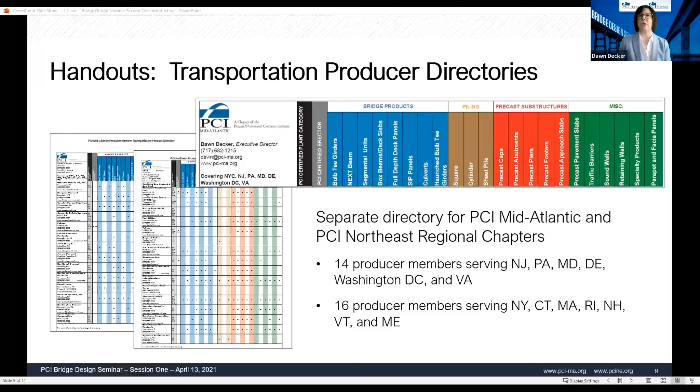A little bit about some of the handouts that you should see in the chat function at the Dropbox folder. PCI Mid-Atlantic and PCI Northeast have created easy-to-use, up-to-date transportation producer member product directories. In the Dropbox folder, you can download each of these files. Product categories—if you look to the upper right part of the screen here, you can see that in these matrices there are the bridge products, piling, precast substructures, and other products such as sound walls, traffic barriers, and specialty products on these directories.

PCI recently published a new 2021 Transportation Publications and Online Resources Catalog. This 20-page reference guide, also located in your handouts, reviews the 20 publications and 28 online e-learning courses available for your professional use. During her session, Rita will discuss some of these specific publications and courses.

For today's agenda, Reid Castrodale will discuss the basic concepts of prestressed concrete, fabrication of prestressed girders, and economical detail of prestressed girders. Notice that each one of these topics has a separate handout in your session 1 folder. Greg Gorman will deliver a virtual plant tour, and Reid Castrodale will provide an overview of transportation resources, including NEXT beam updates. We'll conclude with a question and answer period facilitated by JP Binard and Reid Castrodale.

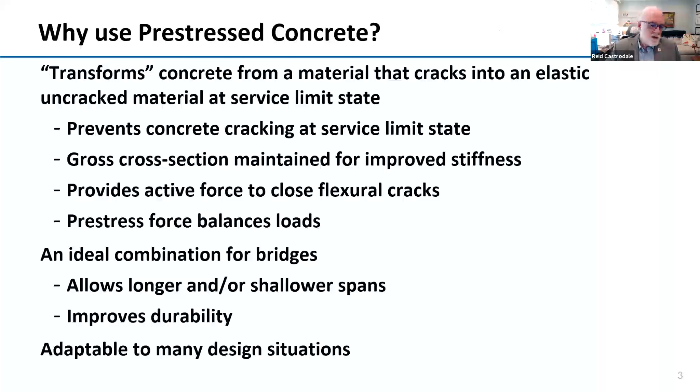Another concept involved is that prestress forces within a member balance loads. We'll talk about that briefly in just a moment. It's really an ideal combination for bridges: prestressing allows longer or shallower spans, improves durability, and it's a very adaptable concept.

When we prestress concrete, we use high-strength steel that is pretensioned or prestressed, and the reaction of that against the concrete precompresses it to counteract the tensile stresses, eliminating cracking at the service limit state.

Typically when we design, we just look at stresses, but this approach can be very useful in some cases. If you have a circular or parabolic tendon profile, it exactly counteracts a uniformly applied load. Even with straight strands, you have a moment being applied that counteracts, not exactly, but still counteracts the applied loads.

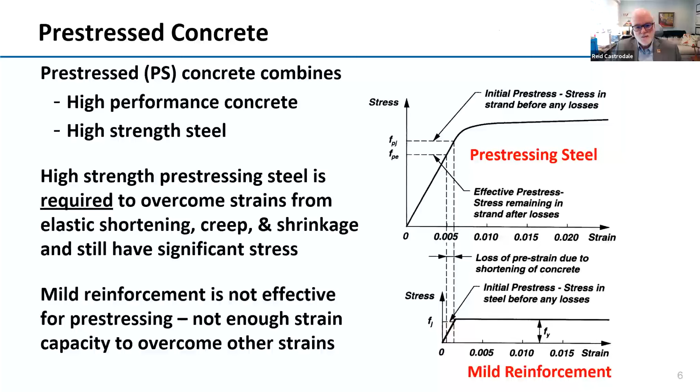You have permanent anchorage hardware then that is used to transfer the force and maintain that elongation in the steel. After you have locked up that elongation, applying that pre-stress to the element, the duct is typically grouted both for bond as well as for corrosion protection.

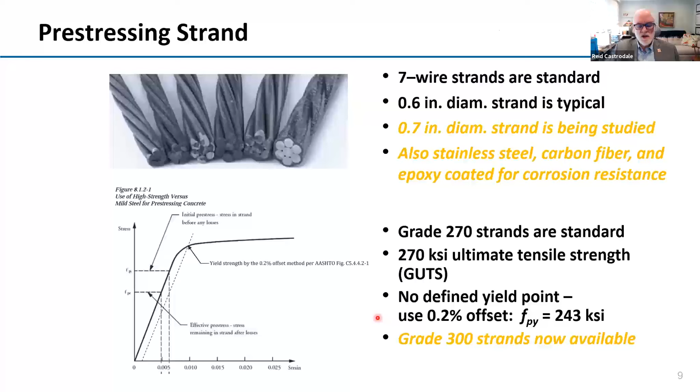When you post-tension a member, you have to have hardware, and this is probably the last mention we have of post-tensioning, other than some combinations with pre-tensioning. You have to have a device that's embedded in the concrete that distributes the force into the concrete, since it's a highly concentrated, large force being applied through all these strands.

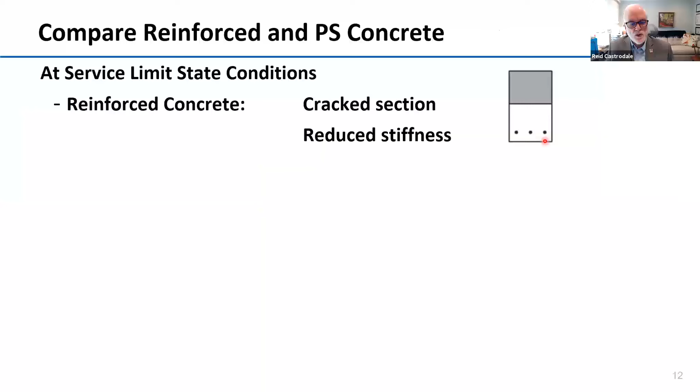If we compare reinforced and pre-stressed concrete behavior at service limit state, with reinforced concrete, as we all know, it's a cracked section. So the top of the flexural member would be in compression down to the neutral axis. Below that, we neglect any tensile capacity of the concrete, and the only thing available to provide the balancing force for the compression is the mild reinforcement.

For pre-stressed concrete, we have an uncracked section at service limit state. While we may have a little bit of tension, it's not enough to crack the section, so we're able to use gross section stiffness, which is good for deflection and such.

At the strength limit state, the behavior between the two is essentially the same. The reinforcement does yield if you're using mild reinforcement, while with strands, they're past yield, and we have to estimate the stress in the strands, which is nearing the strength. The compression stress block is the same for either reinforced concrete or pre-stressed concrete.

So why do we pre-stress? We pre-stress basically to get structural efficiency and cost effectiveness. We're increasing spans, reducing the number of girders, whatever it may be, and then durability. We're getting the crack control that we want, and we also have high quality concrete from a precast plant.

So those are the main benefits, but there are other aspects of design that are important: low maintenance, quality, and standardized sections to get the greatest economy out of these cross sections. It's a good clean look. We can accelerate bridge construction. They also have good fire performance. The concrete protects the steel within, and pre-stressed concrete has performed well over many years.

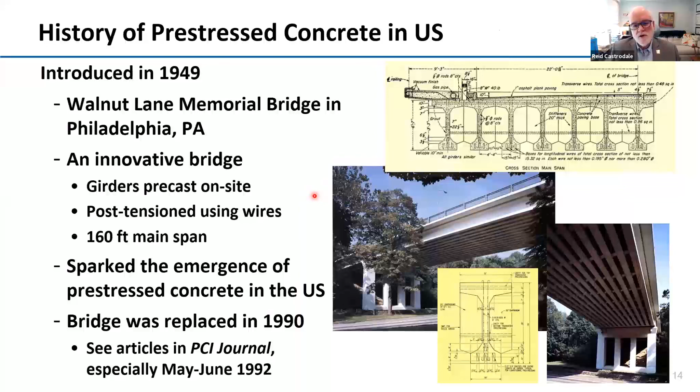Now, there were some difficulties with this early post-tensioning system and the effectiveness of grouting and such, but it was replaced. The bridge was replaced with pretty similar current sections back in 1990, and there are a number of articles both about the first bridge and the replacement bridge, as you see in the PCI journal there.

At that point, there was rapid development of the technology and materials used for pre-stressed concrete. In the 1950s, 7-wire strand was developed, plants with long line pre-tensioning beds were developed, and chemical admixtures, higher strength, and steam curing all contributed to the rapid development and use of pre-stressed concrete in this era when the interstates were being built.

So by 1958, there were more than 200 pre-stressed plants in the US. So from nothing in 1950 to 200 plants by 1958 is really a significant growth.

As the industry was developing, they recognized the need to focus on quality, and they developed a plant certification program. It's been in place since 1967, and it really assures owners, specifiers, and designers that plants have the capabilities and processes to produce a quality product.

Certification programs are also there for plant personnel. Many of the DOTs in the US require PCI certification. It's up to just over 80% at this point of the DOTs, and most in the regions we're talking about today are also requiring PCI certification for pre-stressed girders.

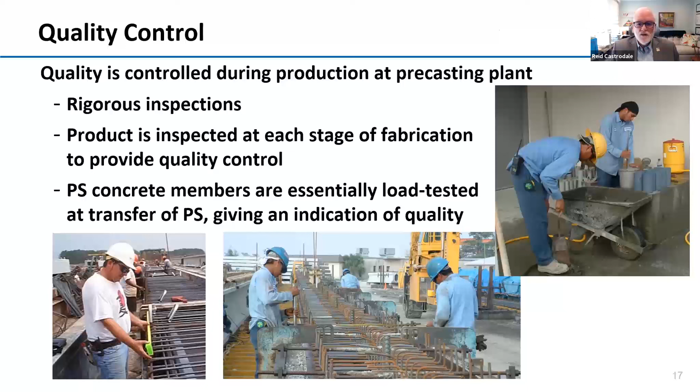So how much or how widely used is pre-stressed concrete? The National Bridge Inventory, which is used by FHWA and maintained by them, has the inventory of all bridges in all states. You can look at that and get some very good information. It's not perfect, but it gives a good indication of the use of different materials for bridges.

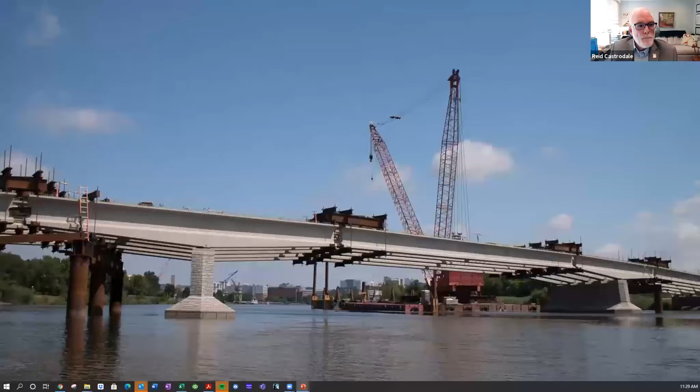So with that, that completes the first of our presentations, and I will move on to the second one, which I am also doing, to talk about fabrication - essentially what's in chapter 3 of the bridge manual.

Economical fabrication of pre-stressed concrete bridge girders really depends on us as designers designing properly and providing good details. For the most part, we have good details that have been developed over the years, and it's good to use those - we want standardization, that's important. So that's part of the reason for this presentation, so designers will understand how girders are fabricated and some of the reasons behind details that could help us get the most economical solutions.

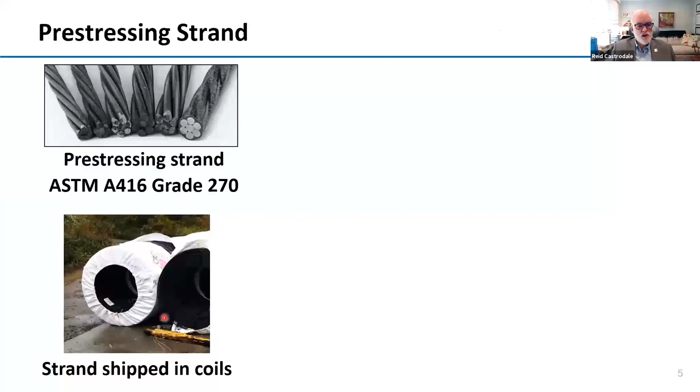You see these here. We'll have another brief discussion of those materials. Again, 7-wire strand, grade 270. The strand comes shipped in coils that you can see here. And then they're placed, strung on the bed.

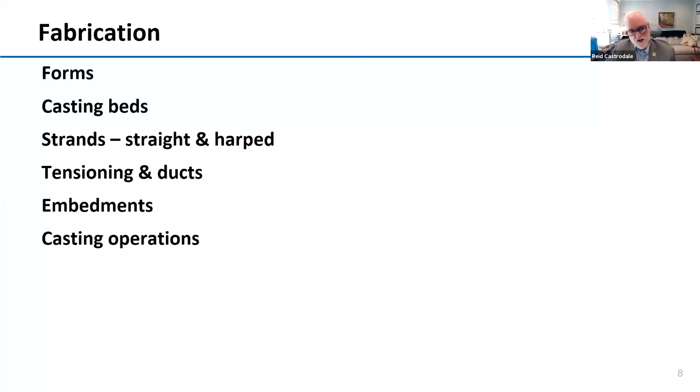So now we'll talk about fabrication. Each of these topics will be discussed as we go along, and we'll start out by talking about forms. A number of different types of forms. Oftentimes we don't have to think about that as a designer, but we should be aware of them.

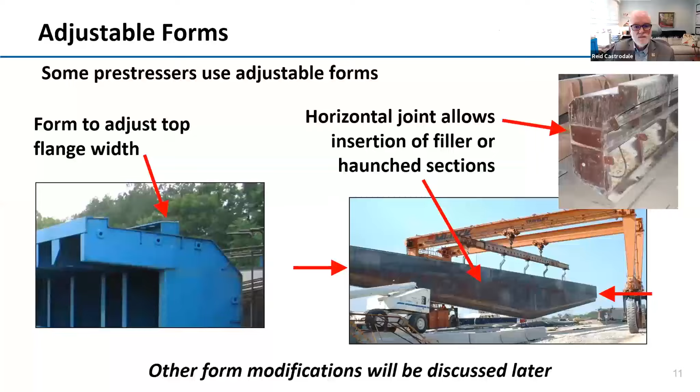So that's three sides - the top, the bottom, and each side - formed. We have to confine the ends too. We have to provide a header, it's called, to end the girder. So that's a form that's applied at the end.

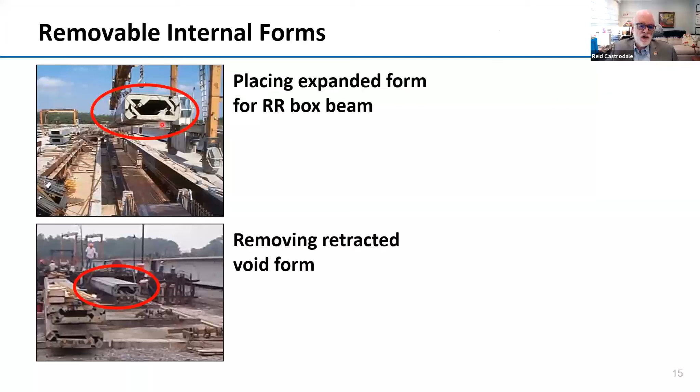This is a railroad bridge box girder being fabricated using a collapsible interior void. Something else we sometimes see fabricated using a collapsible void is a cylinder pile, where the form can retract upon itself so it can then be extracted after fabrication.

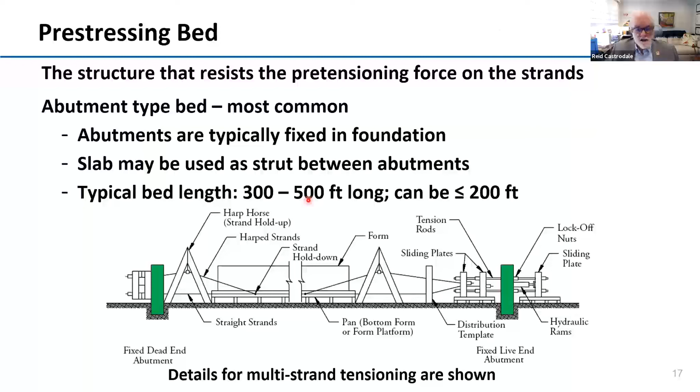For pre-stressed beds, we have to have anchors at the ends, these abutments at the ends. That's typically what's done. If we don't have a self-stressing form, instead we have side forms that are moved on and off and segmented, so there's no way they can really function as a form that would resist the pre-stress. So instead we have a structure at each end, abutments, fixed into the foundations. The slab may function as a strut between the abutments, and these beds can get quite long, up to 500 feet, maybe even longer. In some cases they can also be short, depending on the types of products being manufactured.

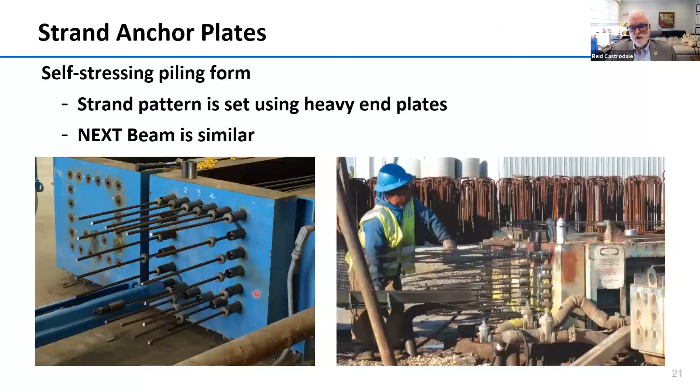But it's a barrel that's tapered, with a tapered recess in it. There are wedges, typically 3, held together by an O-ring, and the strand passes through, then there's a cap that's spring loaded that connects into that.

There's also the potential for using strand splices. Now, you don't put these within members. This would be if you had tails that you wanted to use for stressing, maybe you had a lot of unused space in a bed and were going to have to do that several times. It's possible to use strand splices to minimize the use or waste of strands in situations like that.

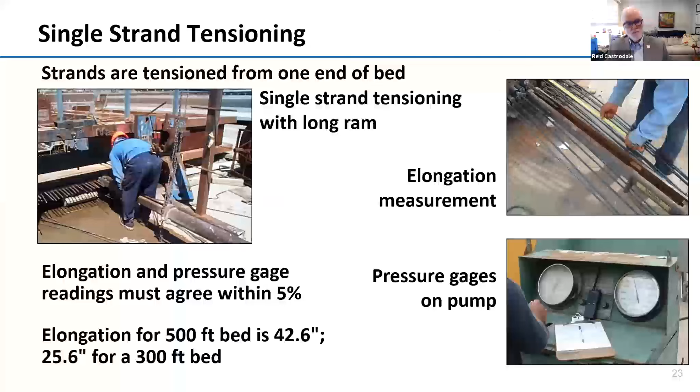There's also a concept called multi-strand tensioning and detensioning, in which the abutment is in the center of the stressing arrangement. You have the strand anchor plates that slide over on the girder side of the abutment, and then you have the ram on the back side of the abutment, and the ram pushes on another plate. So there are a couple of large bolts or rods that pass from this side through the abutment to the other side. And then all the stressing of all strands is done at the same time. So that's gang tensioning.

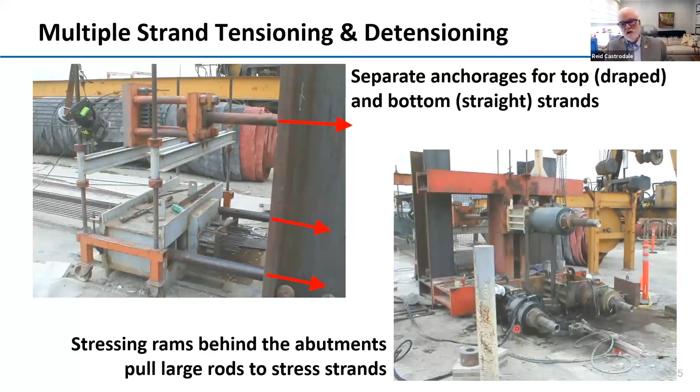Now, when you pull those strands, you have to lock them off, lock the elongation off. You don't maintain that elongation using the rams in case you had a leak or something. So those get locked off mechanically with some nuts on these big rods. And then to detension, you simply re-energize, repressurize these rams, loosen those nuts, and then detension the whole bed at the same time.

We can have straight strands in our beds, you can see straight strands here. Or we can have draped strands. Draped strands have to be held down, they don't just stay put because you told them to.

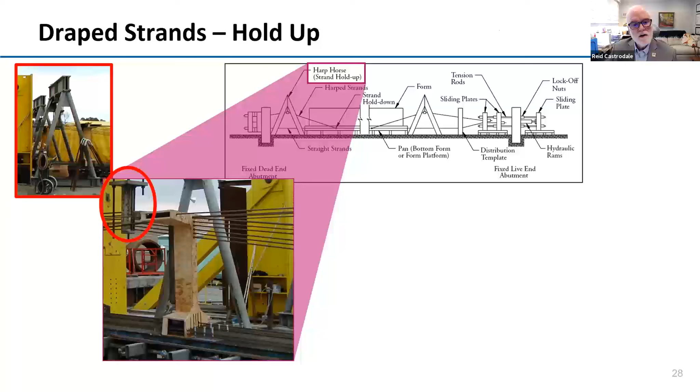Here's some close-up pictures of one plant's internal hold-up devices. This is in the bottom, or lowered position. You can see the rollers down here.

The crane comes in once it's in position, and it lifts up this bar with all these holes in it. Then a guy gets up there and sticks a pin into one of these holes to maintain the elevation of those strands.

Those strands are usually under tension when they're pulled up, so there are safety issues involved, as the guy is right next to live strands being tensioned while he's putting the pin in. There are safety considerations we'll talk about later. Here you can see the strand rollers are up in the elevated position.

When we stress strands in a plant, all strands are tensioned in two steps. You put an initial tension into the strands, depending on the bed length and procedures. That takes out the slack and seats the chucks at the dead end, which is the end you're not stressing from. This gives you a good, reliable, consistent starting point for making your elongation readings.

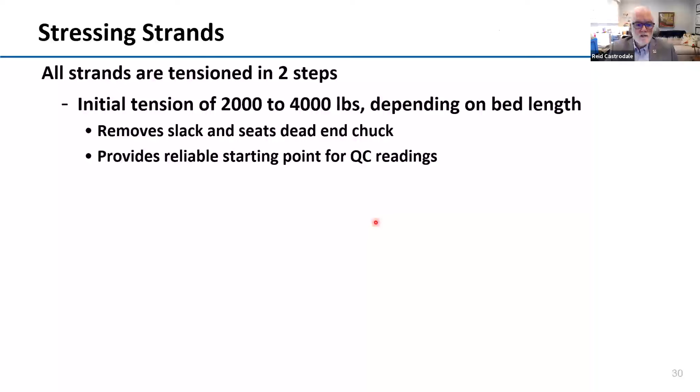After that is established, you apply the remaining stress up to the full tension, which is typically 43.9 kips for a 6/10 inch diameter grade 270 strand.

There may be some corrections applied to the elongation to account for things like the abutment moving, the chucks seating, or temperature, because as temperature changes the strands will elongate or shorten.

Draped strands, if you raise them after they've been tensioned, will have different forces in them. We'll talk about that more in a moment, but the forces and elongations are going to be different for draped strands. Not only do you have safety issues with draped strands, you also have additional complexity in the stressing operation with draped strands.

The other option we have for dealing with stresses at the ends, I'll talk about in a later discussion, I think a week from today. We'll talk in much more detail about draping and debonding.

We can also use debonding to control stresses at the ends. A debonding situation puts a sleeve over the strand which prevents the bond between the strand and the concrete. Remember, for pre-tension concrete, that's how we transfer force between the strand and the concrete.

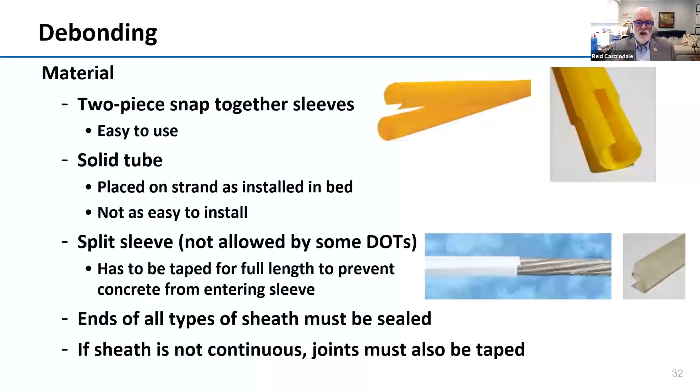If the sheath is not continuous, for example this yellow material comes in certain lengths like 8-foot lengths, and if you have a 12-foot debond, you have a joint in the middle that has to be taped as well. The whole point of debonding is that during fabrication, concrete can't get to those strands to start bonding.

So for an economical design, we really need to understand as designers just how the girders are manufactured. We want to provide a minimum debond length. We don't just want to say, well, 15 feet must be good, let's give 25 feet. That's going to affect the cost, it affects labor, and it also affects the stress condition. So you should provide the minimum debond length that's required.

If you have a lot of debonding, you need to stagger terminations. The specifications deal with that. It's similar to cutting off rebar all at the same location. You typically don't want to do that just to avoid some potential for cracking.

And we can consider access when selecting debond strand locations. If you have questions, discuss with your local fabricator. Give them a call and say, hey, I'm laying out some debonded strands, do you have any comments on this? Or they'll address that when they get to the shop drawing stage.

There are some other things that get put into a girder. We have bearing plates that are used by many states. We oftentimes have diaphragm holes or other types of inserts. And that's just something to be aware of.

If we put on the plans that I want a diaphragm hole at this location, it's not going to stay there by itself. So the fabricator has to add in some detail bars to hold this hole form in the right position when we're pouring concrete around it, and the concrete's going to try to push it around. So we need to be aware of that. We don't have to detail them, that'll come in on the shop drawings, but just be aware that that sort of thing will show up.

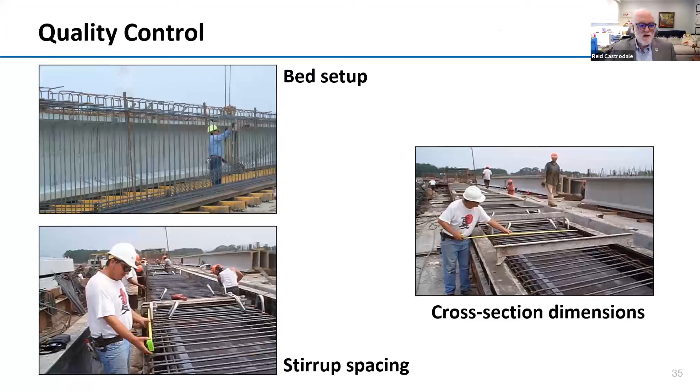All the bars are in place. The QC personnel at a plant will typically develop the mixes, submit them for approval, and then implement the mixes and do the concrete testing at the time that it's getting used. They'll do the testing as well later for the hardened concrete.

If you had like a ready mix truck that's used in some plants, that can be done as well, or overhead cranes. There are a lot of different ways to get the concrete to the forms, and the producers are used to making that happen in an efficient manner.

Once the concrete gets in the forms, it needs to be consolidated. Typically, we use vibration, self-consolidating concrete, SCC, or high slump concrete's often used in order to facilitate the concrete getting in around all that rebar that we put in there and other embedments and such.

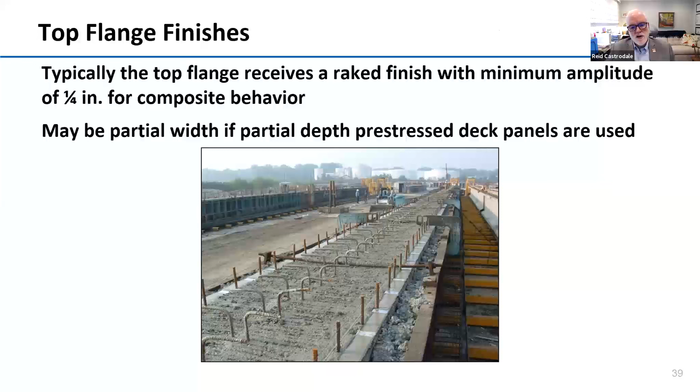That's a good thing to think about. We usually have so much more horizontal shear capacity that we don't have to have it all the way to the edge.

After the concrete gains adequate strength, the initial concrete strength FPCI, we can then detension those strands, and the force will be transferred from the abutments into the concrete elements to pre-stress the elements. So up to this point, the concrete is not pre-stressed, it's just reinforced. So you take off the curing blankets and then you start detensioning.

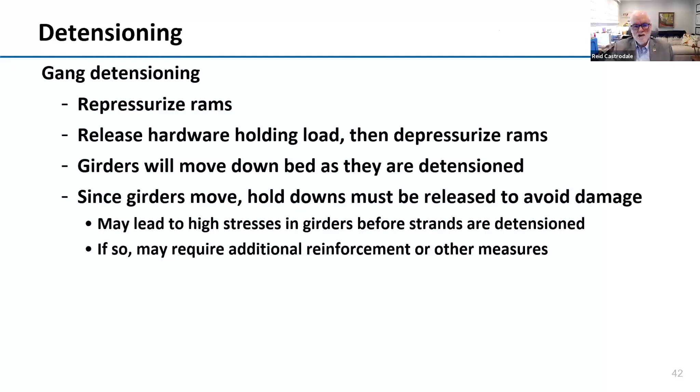When you gang detension, as I mentioned earlier, you repressurize the rams and release the hold down hardware. You have to do that in this case because the girders are actually going to move down the bed as they are detensioned, because all of the movement is coming from one end. If you're doing it between each girder, then each girder is shortening by itself pretty much in place.

As we are detensioning, as I mentioned, the girders will camber up. The ends are going to slide because the girder is starting to shorten. Oftentimes they'll make initial camber measurements while the girders are still sitting on the bed. That's pretty easy - you can just go out there with a tape and measure how far it is up above the bed. In some cases, fabricators will lift one end of the girder and then set it back down before taking the camber reading because the girder has some drag. It's been sliding as it's shortening, so it may actually have a little bit of that camber that's restrained by this sliding effect at the ends.

Also, sliding of the girders in the bed can cause spalling at the ends. That's one of the good reasons to have bearing plates at the ends of a beam. It is an expense, but it does prevent spalling. It's probably the most fail-proof way to keep spalling from the ends of the beams.

Especially if you have a skewed end on a bottom flange, that can be real problematic. You can sort of introduce twist into the girders if the skew goes all the way to the end. So it's generally recommended to try to keep the skewed ends - for skewed girders, you keep the bottom flange square and you only skew the top flange. We'll see a detail on that after a while.

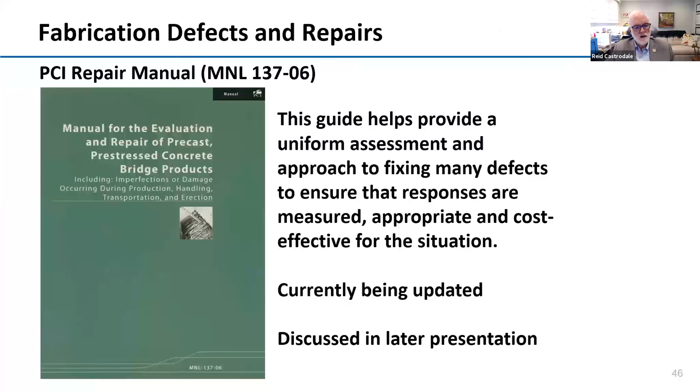Once the girder has been finished and is coming out of the bed, it gets handled. If it's just coming out of the bed, it has to be handled. It goes to storage, and then it's handled again to put it onto the truck. We'll talk a little bit about that, and there is good discussion of that in the PCI bridge manual.

Having a problem here getting it to move ahead. There we go.

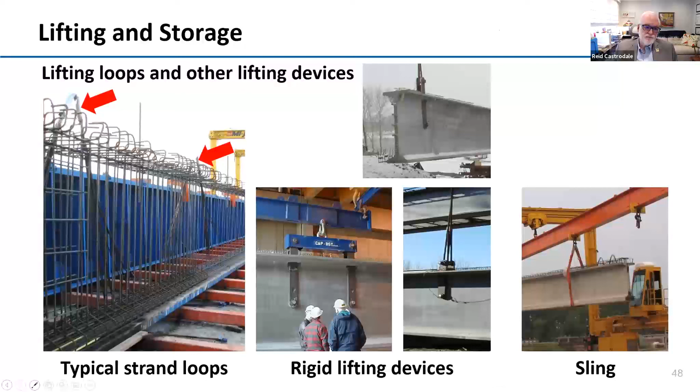We also store our product in the plants, unless somebody's really eager to get the girders. Typically the girders or panels are stored in the plant. There are approaches to doing that appropriately—you have to have dunnage that's adequate to keep them level so that they don't tilt.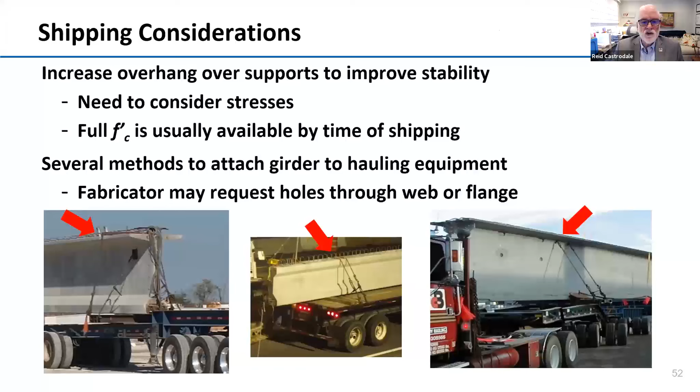Again, those are details that the fabricator will work out with their hauler. There are considerations about shipping—we can, and some producers have, fabricated girders that then have a problem getting a permit to get out of the plant. So that has to be considered at some point in the design process.

Also, the length of the girder has to be considered for curves and obstacles. The shippers are used to doing that kind of evaluation. There are other factors involved here, and we'll talk about those more when the discussion about lateral stability comes up on the third day. Access to the site is also important. So if while designing a girder you have questions about shipping, handling, or stability, please call the fabricator and talk to them, and they can get in touch with their shippers if it's a different entity, so that can be worked out to make sure you have something that can be delivered once it's fabricated.

This is that same girder that we saw earlier. It was the record length: 210 feet long, 110 inches tall. It was an NU girder, 2,800 millimeters. Here you can see it loaded up, with that back dolly being turned to steer. So that was a long girder.

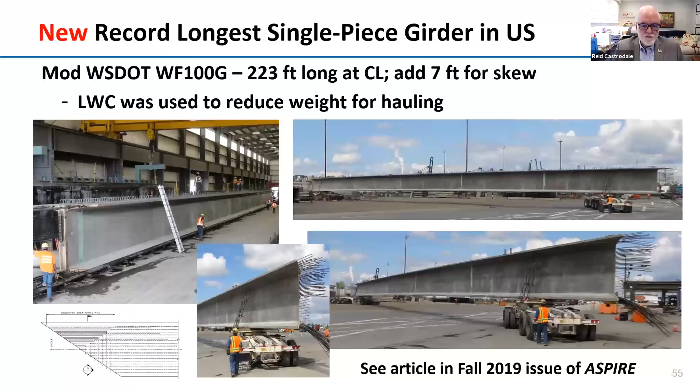You can also ship girders in ways other than on trucks - barges. One does have to be careful when loading a barge, however, because that's a fluid situation, literally. If you load it up asymmetrically, the barge begins to move asymmetrically and may do things to your load that you weren't intending. That's not a designer's problem, but it's an issue fabricators or contractors need to be aware of. I've actually been on a job where girders disappeared off a barge because a contractor unloaded them asymmetrically.

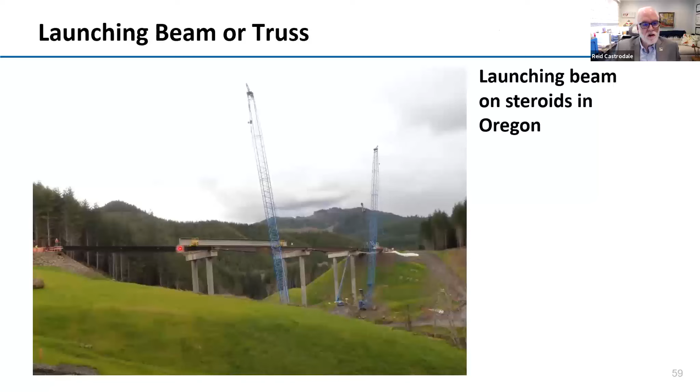Here you can see the truck backed up and positioning, the crane positioning the end of the girder onto a trolley on the launching truss or beam in this case. So the truck is then going to back up, pushes it on, it gets to the other end, then now you have a crane on both ends. But I think what they're doing here is repositioning to bring this trolley back under this end.

And these trolleys are actually motorized, so they're driving this girder across the launching girders to get down to the other end where they have a couple more cranes - one down at the bottom, and one up at the top that can reach this other girder. These photos came from the late Dr. Keith Kaufman with Knife River, a really outstanding fellow. They did some very innovative things out there in Oregon, and he was behind a lot of that.

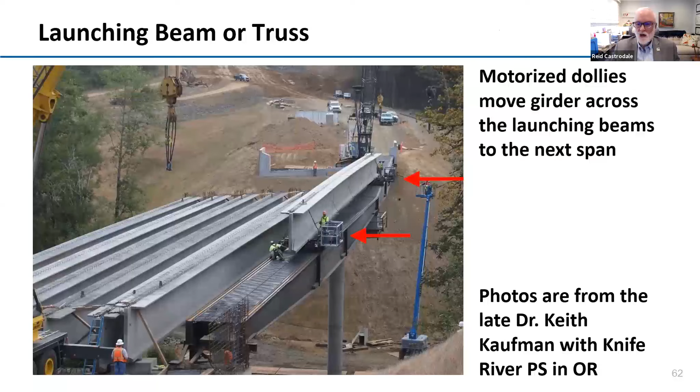And a few last comments here. Occasionally we'll use shoring under girders. We don't need to use it a whole lot. It's typically if you're doing it for spliced girder construction, or maybe if you have an integral cap.

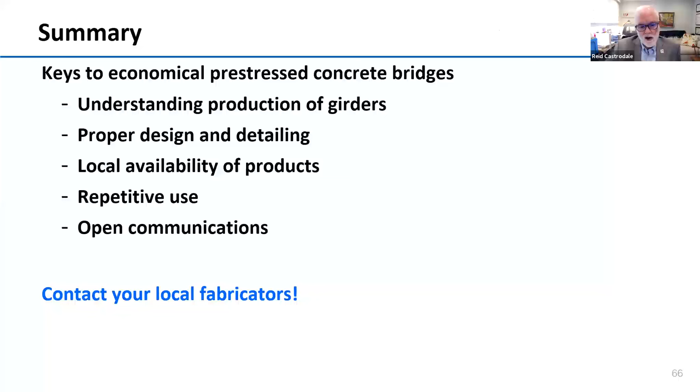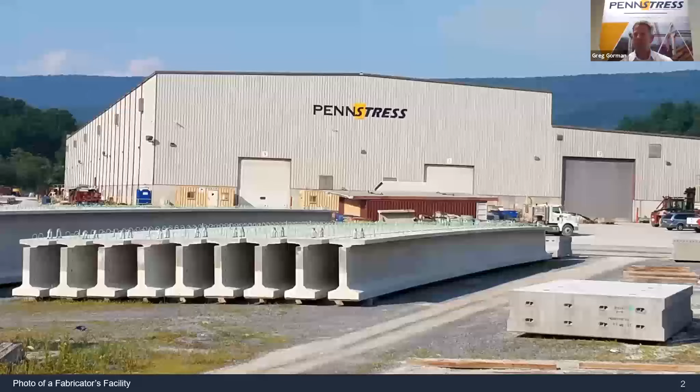Our plant in Roaring Spring, Pennsylvania is about 250,000 square feet of production space. There are 7 casting beds and shops, steel shops and carpentry shops, some in-plant offices, and kind of all the above.

Well, it all starts with the engineering. If you don't get that right, it seems to follow the project throughout. So it's extremely important to get that right.

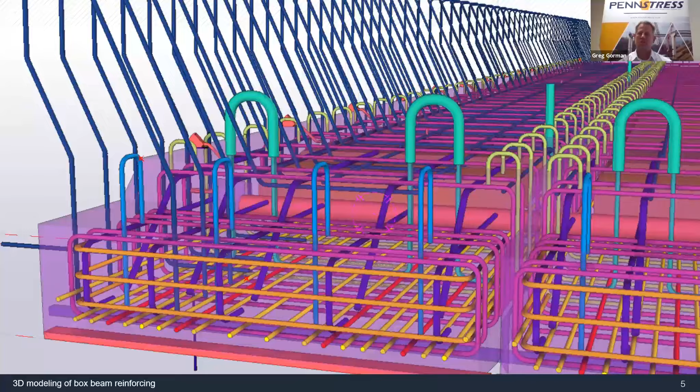A lot of producers these days are using 3D BIM technology. We've been using Tekla by Trimble now for several years. Here we see the guts of an adjacent box beam, so you can see all the reinforcing steel, the post-tensioning ducts, the lifters, and also the parapet steel. Same thing for a bulb T. One of the big gains we've experienced with using 3D is no longer can you draw two things that occupy the same space. So we've had much better quality drawings down in the plant, much better fit up, and that relates to better fit up in the field as well.

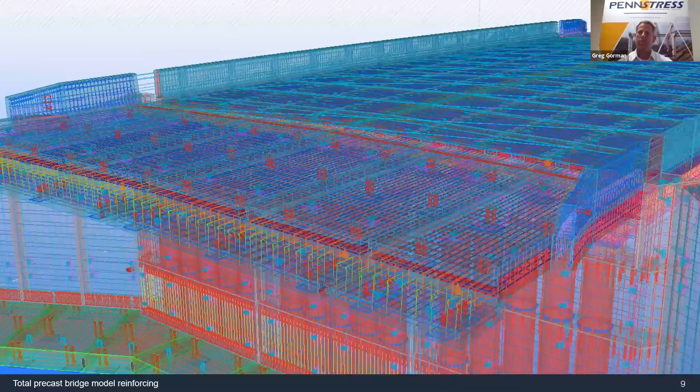Just another skeleton of another bridge. This is one of the Berks County underclearance total precast bridges in Berks County over I-78.

Just looking at all the stuff that Reid was talking about with the pre-stressing and the weight of the pieces and all the cranes and equipment, there's a lot of forces. So safety is paramount. And quality control: PCI certified plants have a cache of PCI certified, usually level 2 and 3, quality control techs.

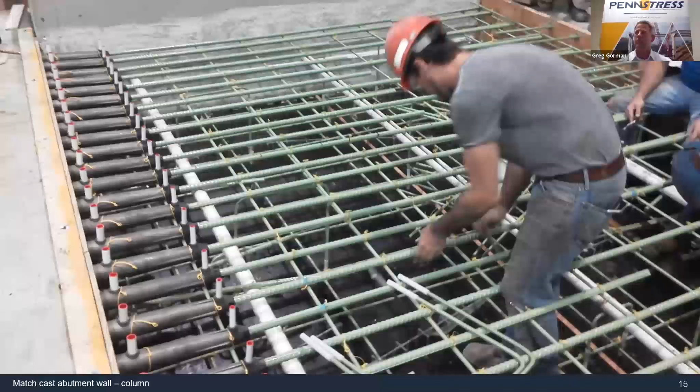This is an example of an abutment wall. This is called match casting. At the top of the screen you see it's a corner column for a total precast bridge, and the abutment wall is being cast up against it, so that acts as a form, and it's called match casting.

So you see the setup here with all the reinforcing, you can see the post-tensioning ducts, and on the left of the screen you see the splice sleeves. These are NMB splice sleeves, and that's a very common connection between wall to walls if they're stacking, or certainly wall to foundation.

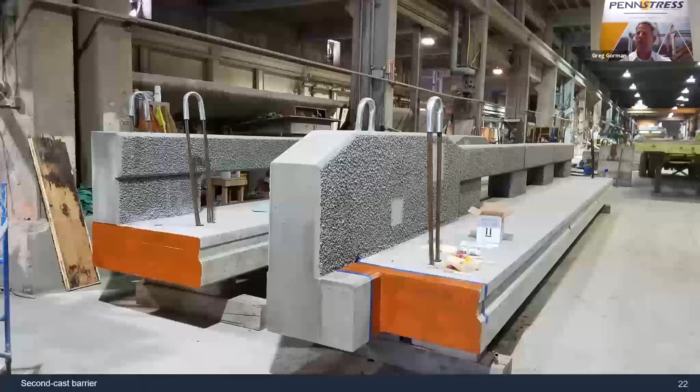This is an adjacent box beam. It's a fascia beam set up with a form liner, architectural finish. It's set up, getting ready to get the forms on and pour it. And this is the piece completed, so you see kind of a unique form liner finish on that. This is detailed and ready to take out to the yard.

Most fabricators are going to have a decent sized carpentry shop for making formwork, and also a steel fabrication side as well to fabricate all the reinforcing.

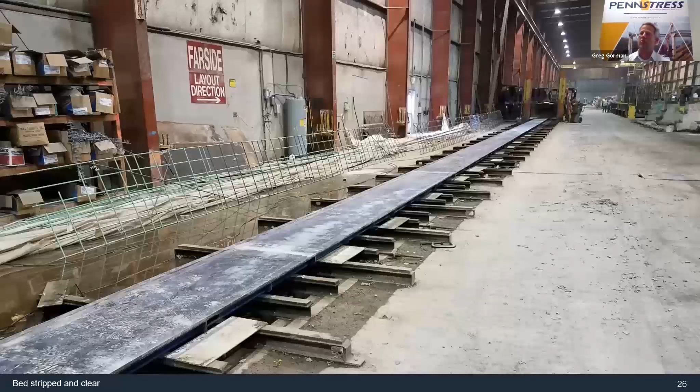We're going to walk through the setup of a bulb tee and then also a box beam. So this is what we call the pallet liner, another term for it is soffit. You saw that in Reid's presentation. But the beams were just stripped off of this from the previous day's pour. It'll get cleaned and oiled.

And then we'll put some plywood down on top of the liner and pull the strand down the length of the bed. It's important to get the plywood there because you don't want to drag the strand through oil, because you need to have that strand bond for your pre-stressing.

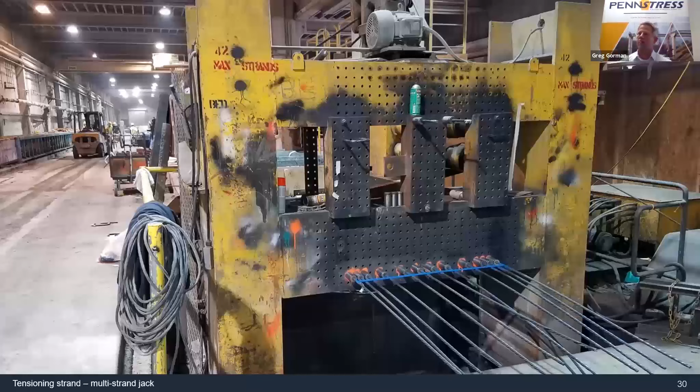And this is the dead end. We refer to the other end as the live end. This is the dead end, or the anchored end. And this is another example.

Reid had talked about a multi-tensioning system or device, and this is one of those. Sometimes precasters have those, or the single strand version.

And this is the live end of a bulb tee after all the strand has been stressed in the stress blocks. Some of the stress blocks, like Reid had showed, are plates, and sometimes they're just set up with all the holes like these are.

You can see at the live end some of the quality control markings to be able to go back and check for slippage. And if we could see a little bit more of the strand, you might see marks for checking elongations as well, which he talked about.

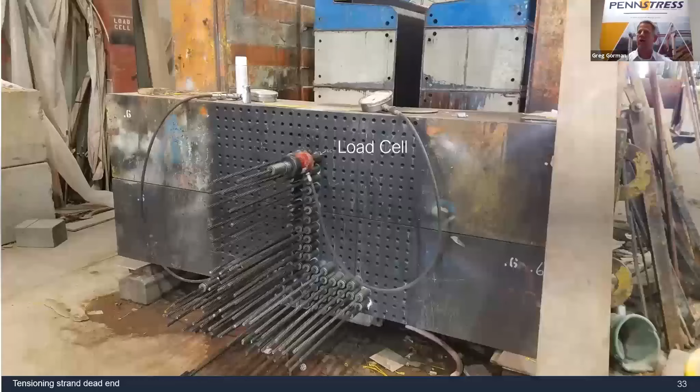Oftentimes load cells are used at the dead end, and different customers have different requirements for load cells and how many are used. But typically there are two functions: one to verify your pre-tensioning forces, and also to check for slippage, especially if something is going to be set up for any length of time. It's something you can go back and check to make sure you don't have any losses.

And this, I think I saw in one of Reid's slides, he called a harp horse, but he also called it a hold up. Especially at the ends of the beams, and if you're doing more than one beam to a bed pour, you need to have a hold up in the middle for the draped strand.

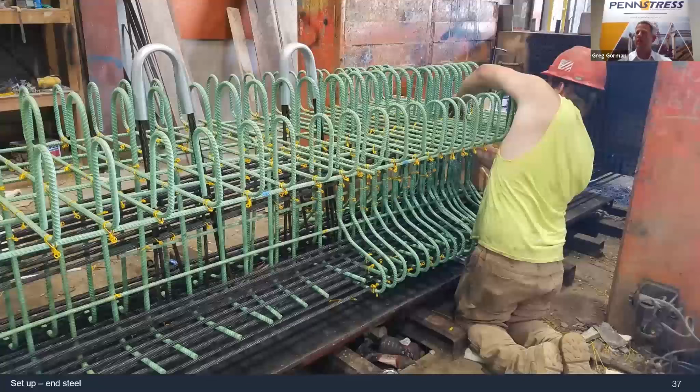Okay, this is the beam with all the stirrups, which I call top racks, installed, and you can see the draping in the middle of the beam. And then tying in the end steel as well.

Here we have a bulb tee, pretty much tied up and ready for forms. You can see at the front end the diaphragm inserts and all the strand stressed, and then the forms go on.

And box beam, same deal. So all the parts and pieces for a box beam are ready to go into the casting area.

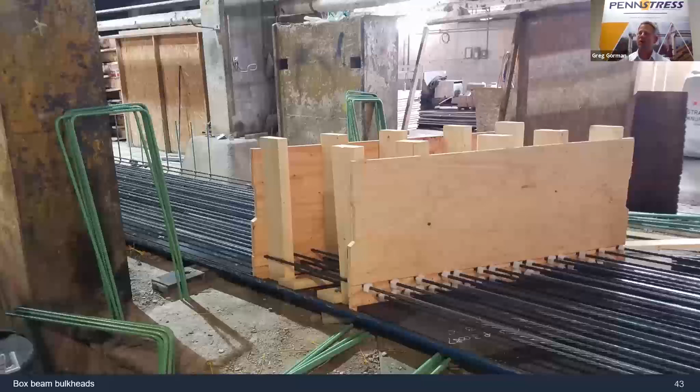So we call the end form of a beam - this is two ends of two separate beams - a bulkhead. You see the strands that are going through, and there's some styrofoam pieces as well. What that does is it leaves kind of a section out where we can go back and burn those strands back and then patch the end of the beam.

Quality control from A to Z, beginning to end. Level 2 and 3 PCI certified, and just checking everything. On most DOT projects, there's a third-party quality assurance inspector as well. So a lot of quality inspection in a plant.

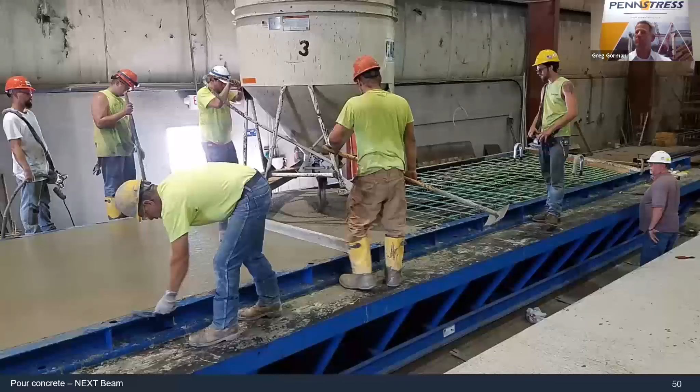Here we're pouring a NEXT beam. And the same NEXT beam, this is the curing. We cover it up, and this is steam cured.

So some customers allow you to take the forms off of a piece before you reach your release strengths, and some don't. But once you get to that point either way, if you're required to get release strength, after you get that, you remove the forms.

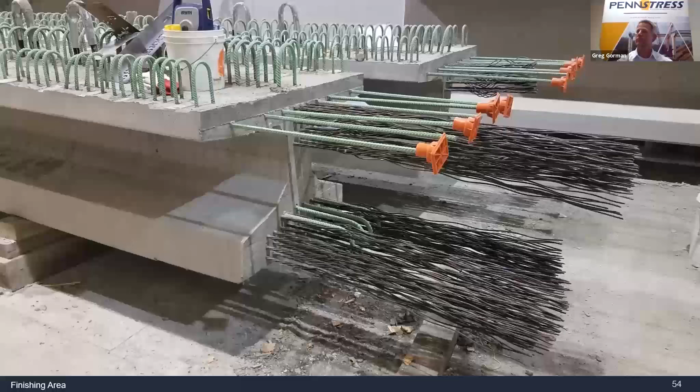And these are what the beams look like when they come off the bed, and they go to the finishing area. When we're done with them, they look like this. We have a system we call green dotting, which when it's green dotted, it's ready to go out and be stored in the yard.

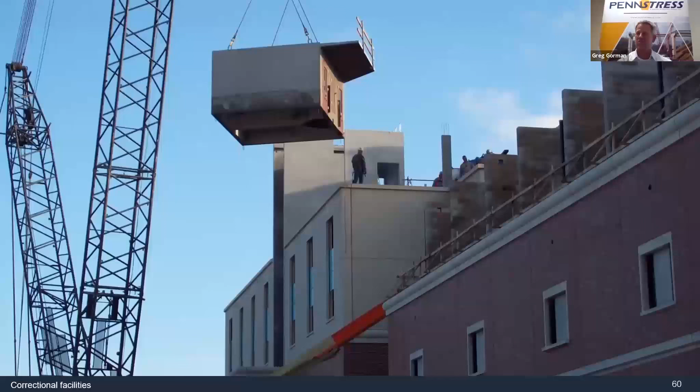I realize this is more of a transportation seminar, but it's fair to show a parking garage because we just erected one for District 6 PennDOT in Valley Forge, not too far from that garage. This is actually an 8-level total precast building, a correctional facility in Toms River, New Jersey.

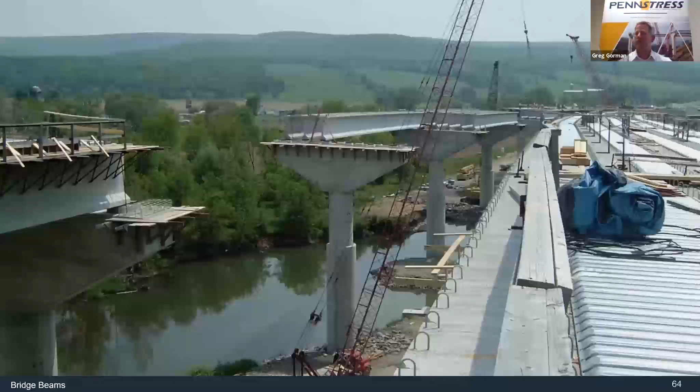This is a splice girder system, cantilever drop-in. It's the Coplay Bridge in Lehigh County. Northeast Prestressed Products fabricated and delivered this bridge system.

So with haunch girders, it gets tricky handling and storing. You have some different, other than normal, considerations. The haunch section in the middle, I want to say these are probably about 10.5 feet deep, or possibly even 11, so that gets pretty deep.

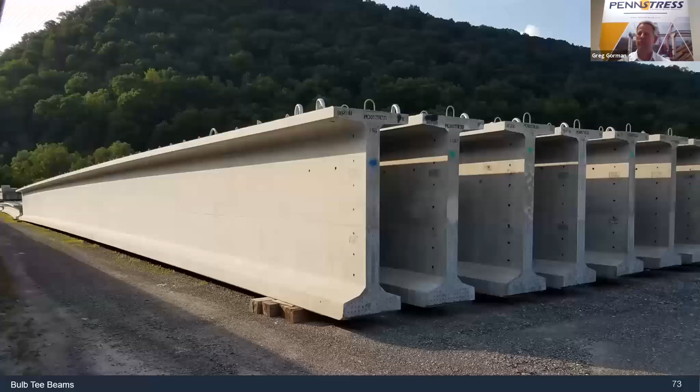Then there's bulb tees. Prestressed piles, this is at Atlantic Metrocast in Portsmouth, Virginia. Bed set up for pre-stressing piles, and another pile of piles.

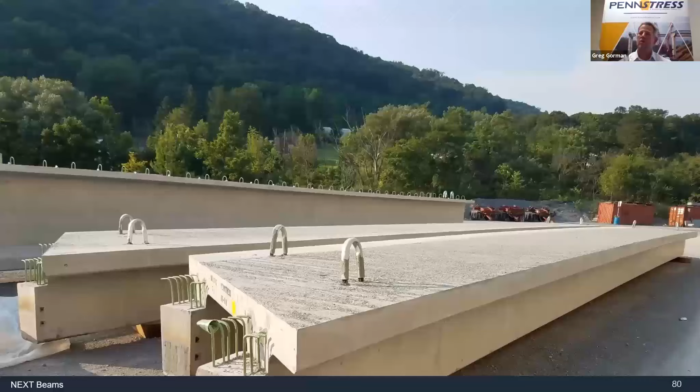Slab beams. And some NEXT beams. These are kind of like parking garage double T's, but the vertical stems are much wider. They're kind of like on steroids.

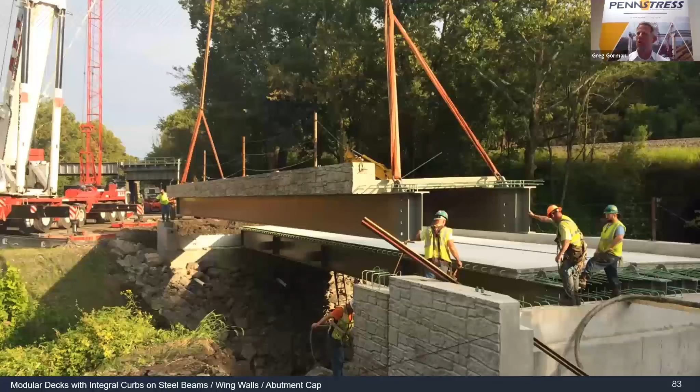This is a modular section, two kind of heavy spread box beams with a precast deck. We also cast precast decks on steel girders. In this case, it has an integral curb for guide rail. Sometimes you have the whole parapet.

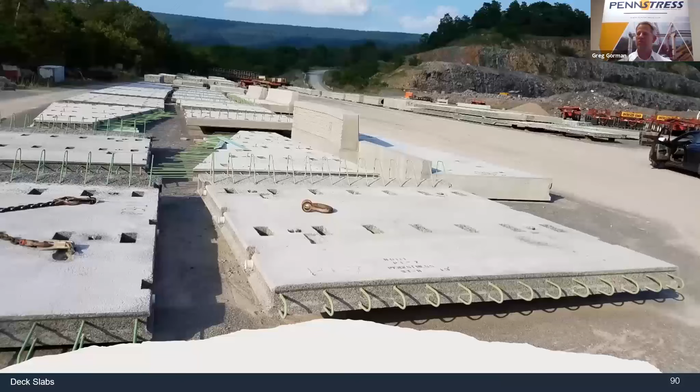A bunch of deck slabs, and you see with the deck slabs, the openings in the tops of the slabs for the composite steel of the girders that will be underneath. And a whole bunch of substructure pieces for a total precast bridge stage to do a dry fit.

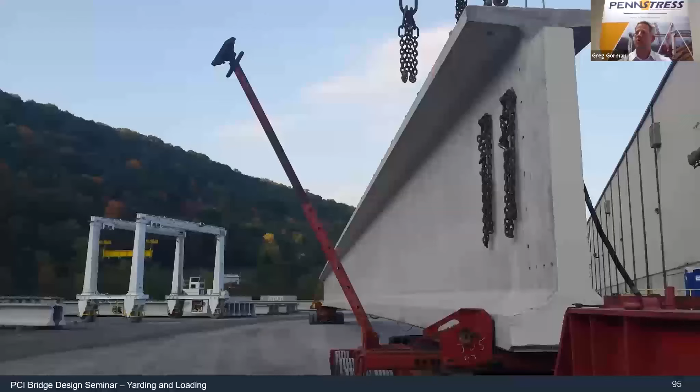So a little bit about yarding and loading. It takes some pretty sizable specialized equipment. Here we have some travel lift cranes taking an AASHTO I-girder out of the plant and taking it out of the storage.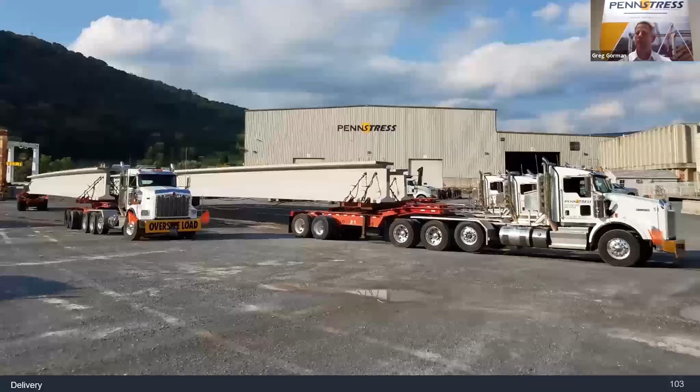So a pile of super load beams getting ready to launch to a job site. And here's the haunch girder that MPP is delivering to the Coplay job. Again, some extra considerations because of the depth of the middle of the haunch.

Okay, I'm going to show a quick video. It's actually a project in Maryland delivering 10 super load beams. And so Reid had talked about the launching girder, and we're going to see that. So the project manager for the owner on this project put a GoPro camera on our beams as they were heading down the road.

So anyway, it'll be a brief video, but you'll get to see the hauling. You'll be able to see the skid beam and the cranes lifting and skidding or launching and then setting the beams. Project site - first beam.

And no trees were damaged in the making of this video. Just a couple utility poles.

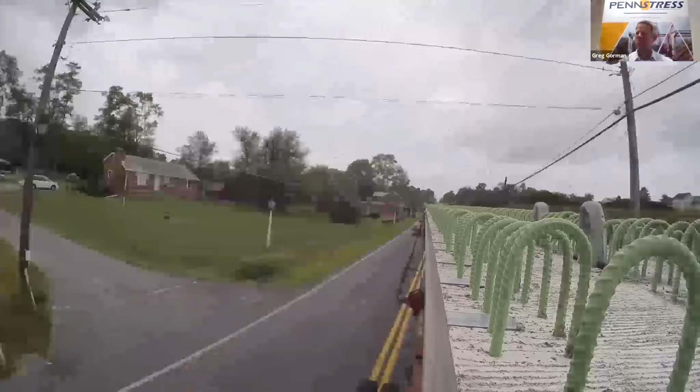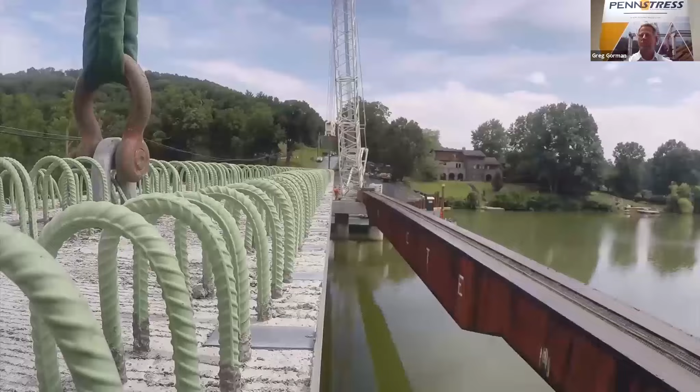So a lot of traffic control getting through some of the turns, out to the job site. You see the launching beam there to the left. So we'll see the crane's going to pick up the one end, set it on the launch. The truck will back it up, and then the other crane will pick it and set it. There we go. There's a spotter.

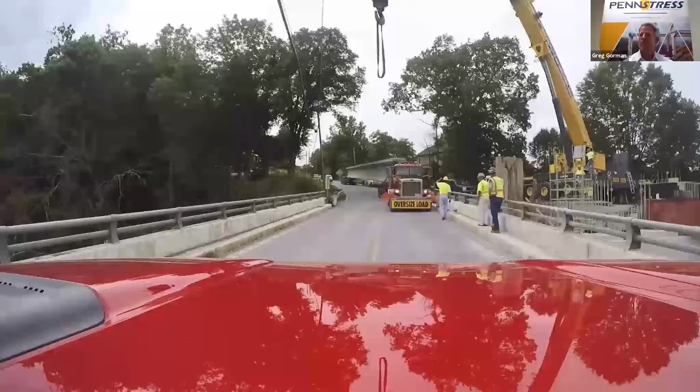So that pretty much wraps it up for me. I just want to say, like I mentioned when I started the presentation, the only thing better than virtual is actual. Before COVID, we've done a lot of plant tours for a lot of different organizations - colleges and universities, engineers, DOTs, banks, just a lot of different folks. There's nothing like going through a plant and seeing how we do the things that we do. So you're always invited, and I think a lot more plants are opening to that now.

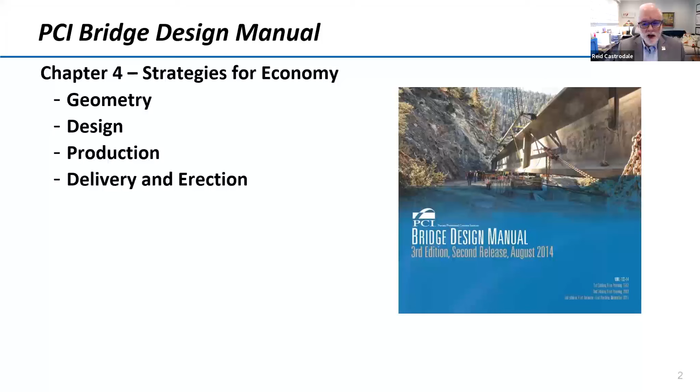That we need to take a look at as we detail girders. Chapter 4 of the PCI Bridge Design Manual does a good job of giving some strategies for economy, some geometry things - I'll hit on just one or two of those items. Then Chapter 6 also has preliminary design charts. It's a discussion, so there are some things that are presented, and then there are design charts for some typical standard girders as well. So I'd really encourage you to take a look at the bridge manual and look through these chapters, see what you can learn.

There are some issues that we have to, as designers, think about. There's span length versus structure depth, and splicing beams to increase the spans. That's starting to happen like in Coplay, and then the picture that I had on my desktop, which is a bridge over the Christina River in Wilmington.

There are approaches to maximizing span lengths, all these sorts of things that you can read about in Chapter 4. But one of the things that's sort of interesting is skews and flares, and I'll just spend a moment taking a look at that. The PCI bridge manual has a detail here - this is coming from the bridge manual, something like what I had mentioned earlier.

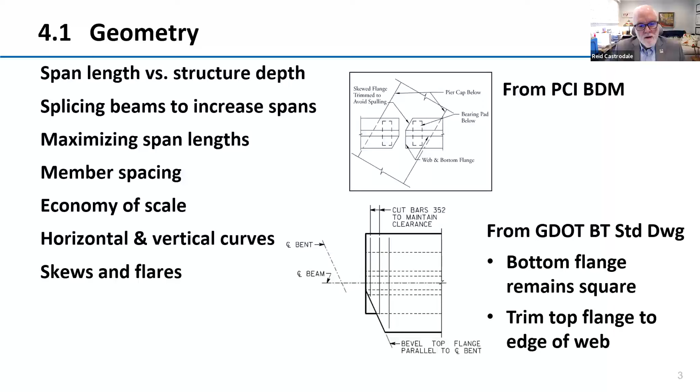Let's just trim the top flange of a bulb tee if possible, and also keep the bearing pad square rather than skewing the bearing pad. Then there's an example here from a Georgia DOT detail where they're showing that you keep the bottom flange square, and here's the trim to the top flange. We can make that sort of thing work by detailing, but it is helpful. Keeping the bottom flange square is helpful for the pre-stressors, and then just having that limited trim of the top flange.

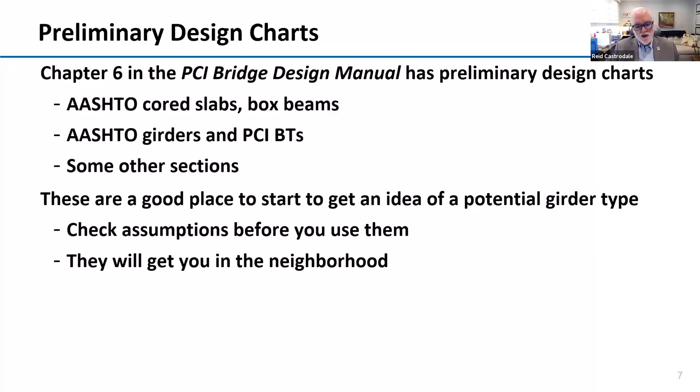One helpful thing is that we as designers should allow the option for same strand patterns if possible. We love to sharpen our pencils and use the least of everything, so we feel we ought to put the minimum number of strands in every girder if possible, but that doesn't necessarily give the most economical solution. If producers are putting multiple girders in a bed, they don't want to cast one at a time if they have to. It may appear that saving a few strands will help, but using the same strand pattern on several girders will help out a lot in economy.

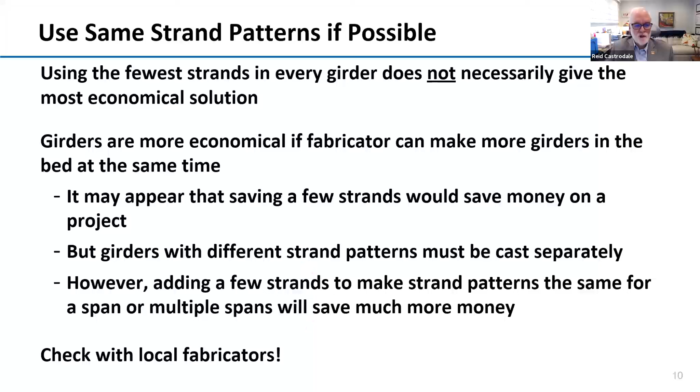I have some examples of this. This is a single design where the designer used two more strands on the exterior girders than on the interior. So there are 52 strands on the exterior girders, and there are 2 of those, and there are 50 strands on the interior girders, and there are 5 of those.

If you look at revising it, this table gives us a summary. Here is the exterior with 52, here is the original design for the interior which had 50 strands, and here is the revised design assuming 52 for the interior girder. You'll see that using 52 for the interior actually improves the stress condition, gets you farther away from your limiting stresses, and also puts you closer to having the same camber as the exterior girders. So it's showing us it would be really beneficial for the producer, the design itself, and the contractor to use two more strands than the absolute minimum.

Now, we did sacrifice a little bit in material. You see here that with 2 girders at 52 and 5 at 50, you use 354 strands. If they're all at 52, you're using 364 strands. So that's 10 more strands, about 2.8% more material.

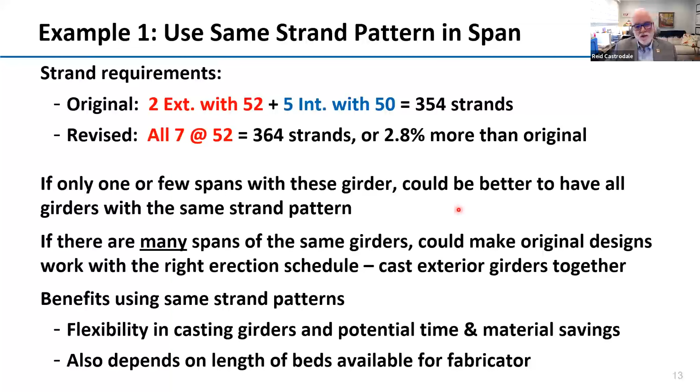But it really depends on how the pre-stressor is set up. If you only had one span and they had a really long bed, so they'd like to cast them all in one or two pours, it would be better to have all the girders with the same number of strands. If there's just one span, maybe you could get away with varying it a bit. It depends on their bed situation, so it's something we as designers need to bear in mind. If they propose something like this, we should be open to it, since it gives them the flexibility to set their beds up as they'd like.

Here's another example, a rough one. There was a series of spans using bulb tees, and then one trapezoidal span with opposite skews. So there are 4 girders in this cross section, using a type 3, which they're not using anywhere else on the project. They have 4 girders varying in length from 27.5 to 56 feet, and the designer decided to design each girder individually, resulting in 4 different strand patterns, with the number varying from 10 to 20 strands.

Well, this causes issues for a pre-stressor. These are short enough girders that they'll want to put several, if not all, in one pour. But if they all have different strand patterns, let's say you had a 300-foot bed, you'd have to string that bed 4 times, so you have almost 19,000 feet of strands requiring 4 pours. Option 2 might be to ask: can I use 20 strands on all 4 beams? Or maybe use just 2 strand patterns.

Maybe I use 20 strands for 2 of them and 16 for the other 2, or whatever it might be, so maybe you could get down to 2 pours. A third option would be if you cast all 4 girders in the bed, maybe using similar strand patterns if you could do that.

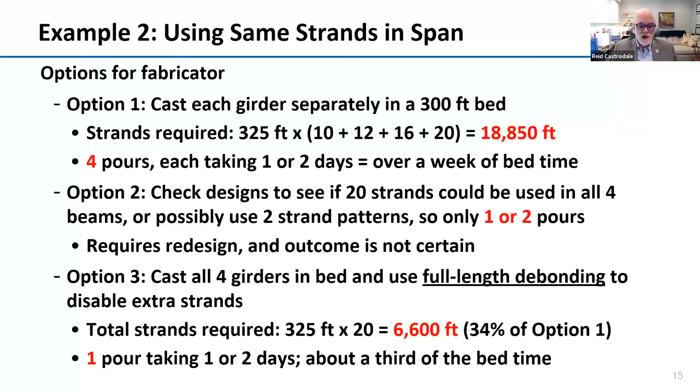Something else that can be done is full length debonding, where you're actually disabling the extra strands. In this case you'd use about 1/3 of the strands of the first option, 20 strands for the total length of girder, ending up with 6,600 feet of strand in just 1 pour. It takes about 1/3 of the time of bed casting.

For this particular job, the pre-stressor recommended using the full length debonding option, but the fabricator had to bid it using option 1 because it wasn't in the bid documents that they could use full length debonding. So they could have saved 12,000 feet of strands.

The DOT allowed them to use full length debonding because it's actually detailed as an option for the standard plans for cored slabs and box beams for NC DOT. So the fabricator knew there was a good chance they might allow it, but he couldn't bid it that way. So the DOT lost out on savings by saving 12,000 feet of strand and a good bit of labor. That's something to bear in mind as we do our designs.

There are more slides in this section, but I think we ought to cut it off here. I'd recommend you go ahead and take a look at the other slides because there are some more concepts presented about detailing of girders.

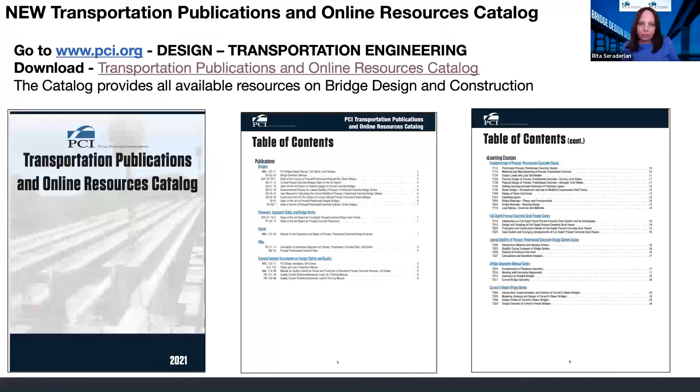I wanted to call your attention to the new transportation publications catalog that PCI just did last month. It has all the information related to bridges that you'd want to know, with an extensive table of contents that will walk you through what's in the catalog. You can get to it through PCI's website under design and then transportation, and if you're online it will hyperlink to the actual document you're looking at.

So you don't have to look at the catalog and try to figure out how to find something. If you find what you want, you click it and it brings you directly to the bookstore, and you can download it for free if it's an e-copy. Some e-copies you have to pay for, but most are free. You can also get there through the publications tab from PCI's website, straight to the bookstore.

I'm going to skip these since we're out of time, but I also want to call your attention to the e-learning center, where there are an extensive number of classes you can take on demand. Reid is giving you the basics today, but if you want more detail on certain topics, you'll find that through the e-learning center.

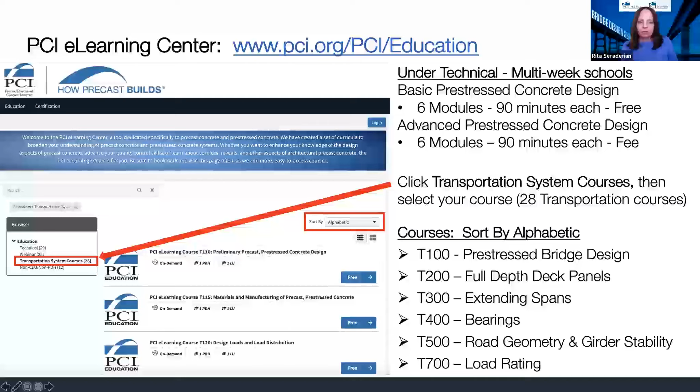Yeah, screwing up the thing. And this is what it looks like. I just wanted to quickly show you - there's the classes, you can sort them, and then you click the one that you want.

It comes up like this, you register, you sign in, and then you begin taking the class. It's a talking module, it'll last about 60 minutes. You can start and stop how many times you want. There are tests along the way, and there's a final test in order to earn PDH credit, and you can download the PowerPoints to follow along.

And then quickly, I'm going to skip my PCI Tech Committee update. But for those that know me, they know that there's a lot of resources on PCI's website. And the thing I wanted to call your attention to is on session 3, we just recently updated the NEXT beam guidelines - a fair amount of updates to it. Mike Culmo on my committee will be going through those changes on session 3, so I would encourage you to attend session 3 so that you could hear about those updates.

And then also the other document that was recently updated was the full depth deck panel guideline. This is what the document now, the NEXT beam, looks like. The deck panel guideline that we just updated includes PT, non-PT, UHPC joint, normal strength joints, and longitudinal deck panels. So it will cover all the types of applications related to full depth deck panels.